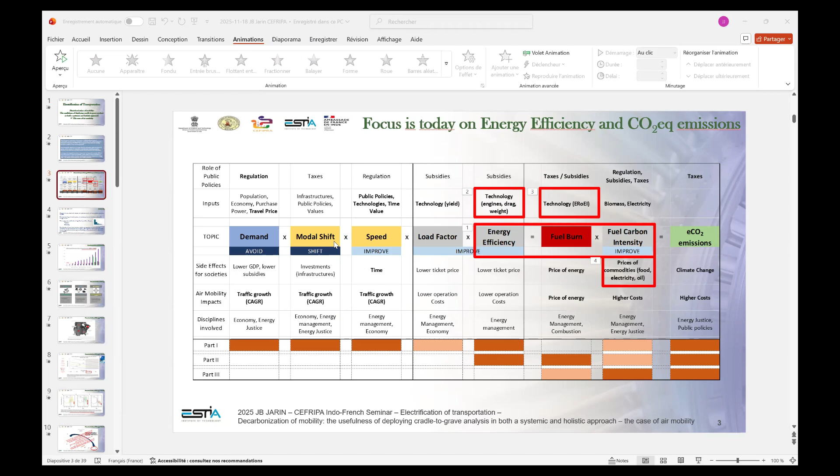We know aerospace or air mobility in general is very global, but you will understand that the impacts can be very local. When we look at mobility, and especially air mobility, we must acknowledge that it means the total decarbonization of the energy sources. This is higher than for cars, because when we look at a plane, in fact 99% of the emissions, when we look at the life cycle analysis, are linked to the combustion of the kerosene.

Biomass and/or electricity, and by regulation or the market - I personally would prefer regulation because the side effect for the populations will be huge. We must acknowledge that it will have consequences in our territories because we will take massive amounts of electricity and biomass. On this slide I try to show the effect technology can play.

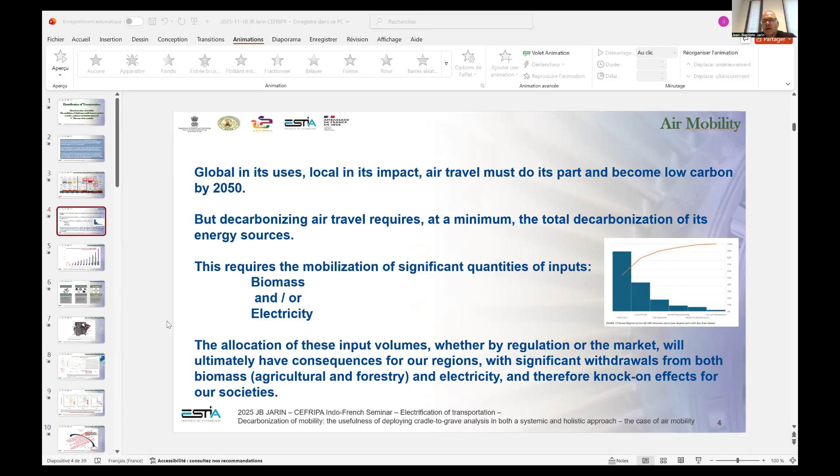But if we have a rebound effect, known as the Jevons paradox, which is that you can improve a system, but if the use of that system is increased, then the overall effect can go in the wrong direction. And this is the case for air mobility.

We have improved the efficiency of planes for the past 60 years, but this came with a lower price of the ticket, and so roughly we divided by 4 the fuel burn per passenger kilometer, but at the same time the traffic was multiplied by 20. So you can see that the fuel burn and the emissions associated just keep rising.

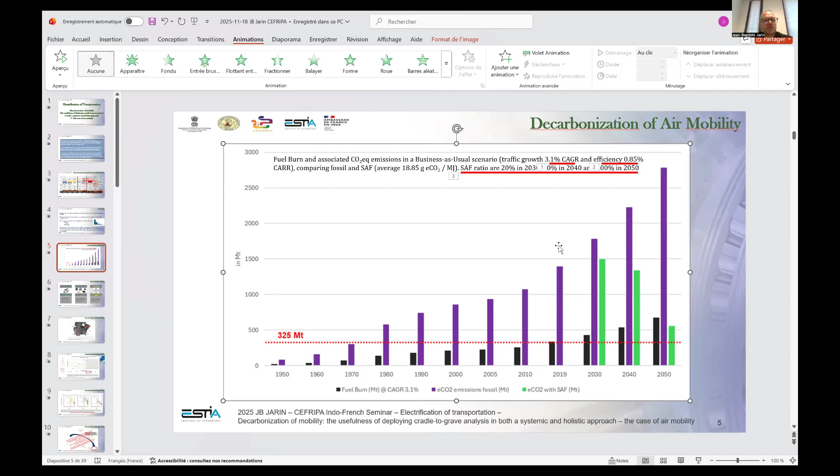Here is a scenario I modelized. I'm not sure you will see the animations, except if I do this, okay. So if the traffic keeps growing at 3% compound annual growth rate per year, which is what's happening today, and we keep the efficiency trend, which means high engineering to keep improving planes and engines efficiencies at 0.85% per year, you can see that since the market will grow faster than the engineering efficiency, the fuel burn and emissions keep rising.

So the only way, and even it's not enough, is to go into 100% decarbonization of energy by 2050. I do not believe this will happen, but at least this should be the goal.

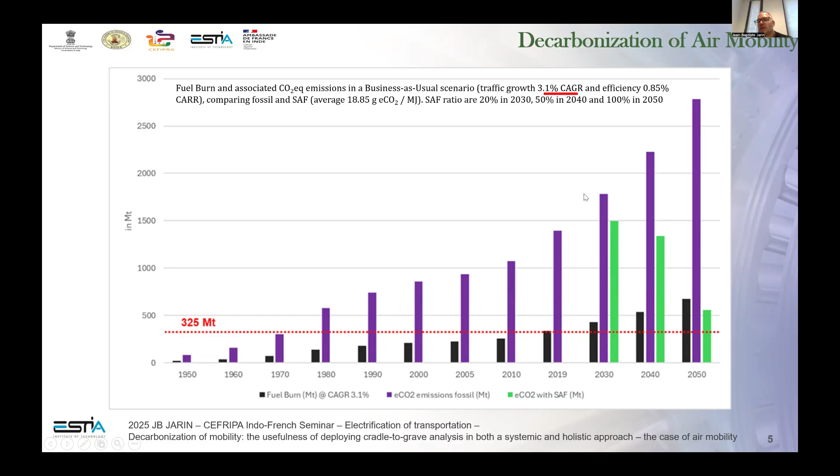So when we talk of decarbonization of energy, and this is valid also for electricity when we look at road transportation, we must make sure that it is sustainable. For example, for electricity, that the electricity is low carbon, which is not the case in many parts of the world, and it's not the case in India, as you know, for now.

We also must look at optionalities, which means in fact competitions or conflict of use, because when we look at biomass and electricity, you have many players. And there also we must understand that we come from the oil world, and oil today is massively dedicated to mobility.

Okay, so when we shift from oil to other sources, such as biomass and electricity - biomass and electricity, they did not wait for mobility to be used by populations. So there will be multiple conflicts of use, and we must understand that when designing systems.

And also we must understand the economics, and especially for the biomass, the economics is about collectability. If you have, and you will see that on the map very soon, a dense energy, it could be okay. But if you have very low energy density...

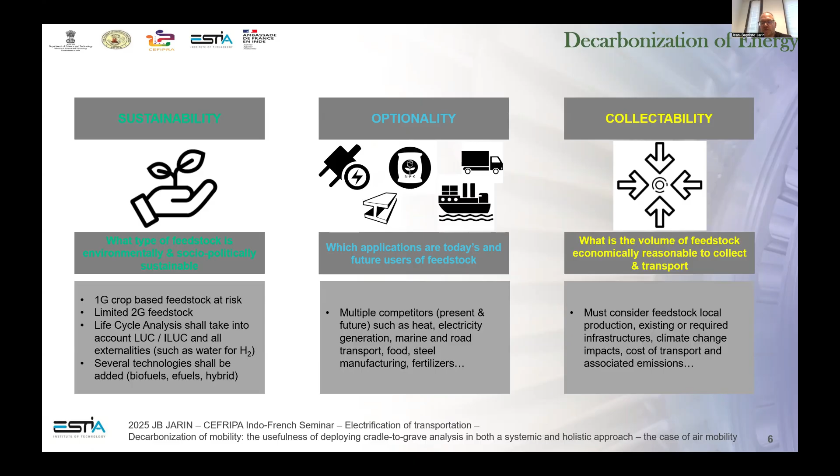For example, lignocellulosic from the trees, this means a very low collectability. This means a very high cost for the societies. This is a map I mentioned.

This is something, and you must understand that most engineers know what's going on for decades. This is from May 2009, so roughly 15 years ago. This is the impact if we want to have planes flying across America, or the United States to be precise. This is the surface of land we need to feed those aircraft flying in the United States.

So it's not the planes outbound of the United States - this is purely domestic use. And you can see that we need, for the 1G, the first generation biofuels, extensive surfaces of palm oil or corn.

And if we move into the second generations, so the waste, typically the jatropha or the camelina or other plants which are seen as energetic plants, you can see that basically you need half of the surface of the country just for the domestic planes of that country. So this is not in sight. I mean, we cannot achieve that.

Algae could be, but algae has many issues. And especially, in fact, you need more energy to extract the oil from the water than you can get of energy from that oil. So algae, it's good, I would say, for R&D, but it will not come for decades, that's for sure.

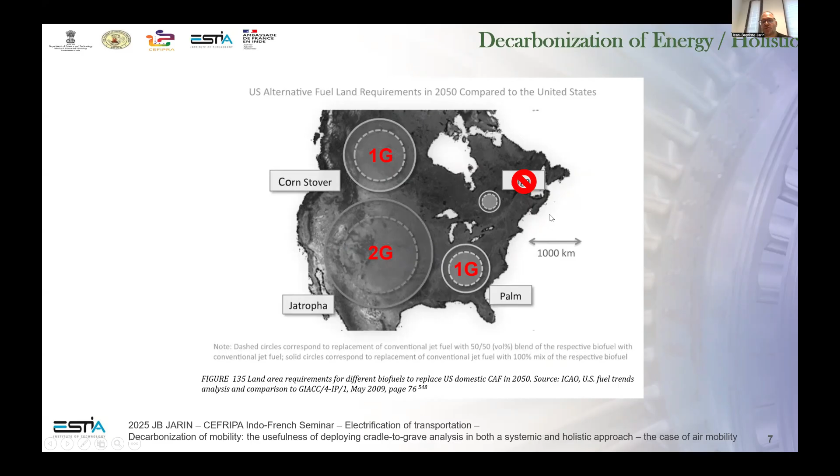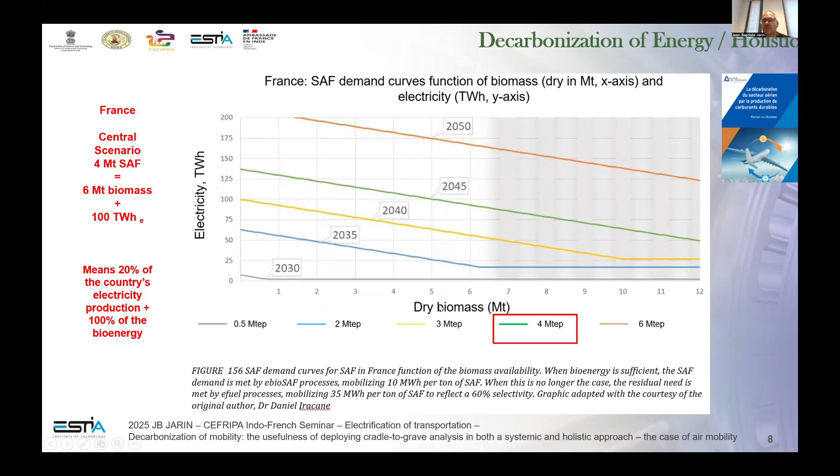Basically, it comes with collateral damages. No energy has no collateral damages, but we need to look at efficiency and then also at equity, because when you take 100% of the biomass and 20% of the electricity, you can imagine this will have side effects for the populations. Among the side effects for the population is the price on commodities.

Here you have a study from the US Academy of Science in the United States. They worked for approximately 15 years over the period. And what they demonstrated is that the price of commodities such as corn, soybeans, or wheat is affected by the policies on biofuels for transportation. And the effect is already very huge.

I mean, biofuel for transportation is less than 5% of the fuel, but still you can see the effect on commodities such as corn is 31% increase of price for the corn, or 20% for the wheat, basically. And this is food for the populations. So we must understand that our choices have significant side effects for the entire populations. This is why a holistic view is mandatory when you look at your energetic system.

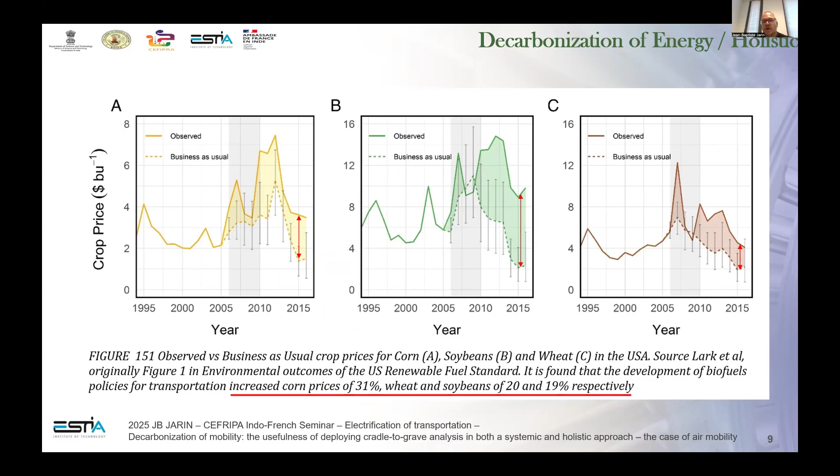When we look at efficiency, and especially when we come from fuel, from oil, and we look at energy, we must understand energy return on energy invested. This is, I would say, key in every design, because every propulsive system will use primary energy, then transform into an energy carrier. So energy return on energy invested, basically, we come today from here, onshore, offshore oil, mainly. This has very high return on energy invested. Basically, you place one, you get 20 to 70 for onshore. So this is very, very efficient.

And then you can lose that efficiency in an internal combustion engine, which has a 30-40% yield. You can afford that because you have a very, very high energy return on energy invested at the beginning. But where we are going is here. I mean, biofuels and e-fuels based on hydrogen are pure exergy. I mean, we lose, I would say, everything. I hope you have that insight, but my first year engineering students generally tend to forget that.

But the lower heating value of hydrogen, which is the core of an e-fuel, basically, the lower heating value of hydrogen is 33. So you have 33, I would say, kilowatt hours of energy in 1 kilogram of hydrogen. But to split the water molecule, H2O, to get that hydrogen, you need 50 to 60 kilowatt hours. So you are destroying energy. It's a negative, I would say, energy return on energy invested.

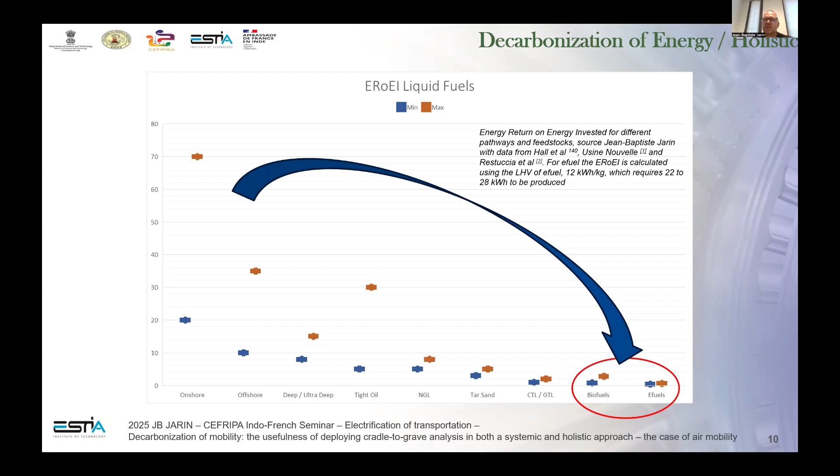And you need to acknowledge that, because this means you need to be very, very clever in all the systems you will design. So sooner or later, we must understand that it's not the technology which is the issue, especially for the sustainable aviation fuel, but it is the availability of the inputs, the very low energy return on energy invested, and the cost associated.

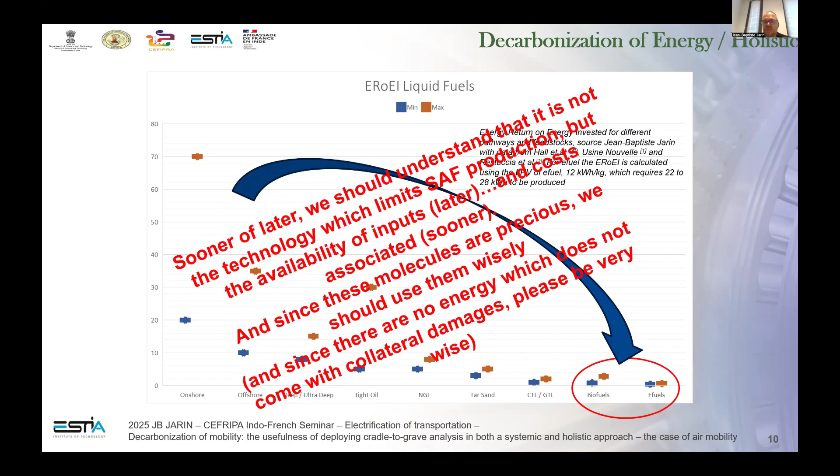And since we are dealing with molecules which are very precious because of the above, you need to be very, very wise. And since I already mentioned it, there is no energy which comes with no collateral damage. Please be very, very clever and be very, very wise. Let's go into cradle-to-grave, and I will translate that into well-to-wake. I will explain in a few.

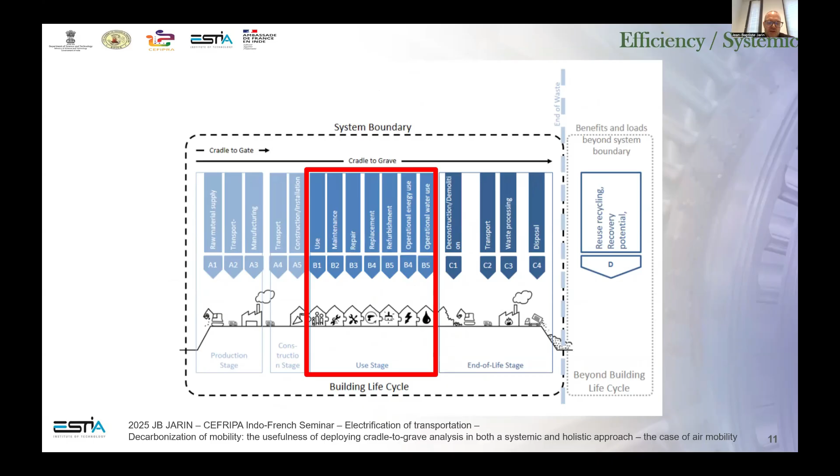So basically, we go into the life cycle analysis there, and when we translate that into energy systems, basically we go from the energy carriers and we have the associated propulsive architecture. So this is where we come from, primary energy, which is oil. We get a fuel tank, and then we get an engine. In our case, in aerospace, it is a gas turbine. The system will be very similar, in fact, identical, when we go into e-fuel or biofuels.

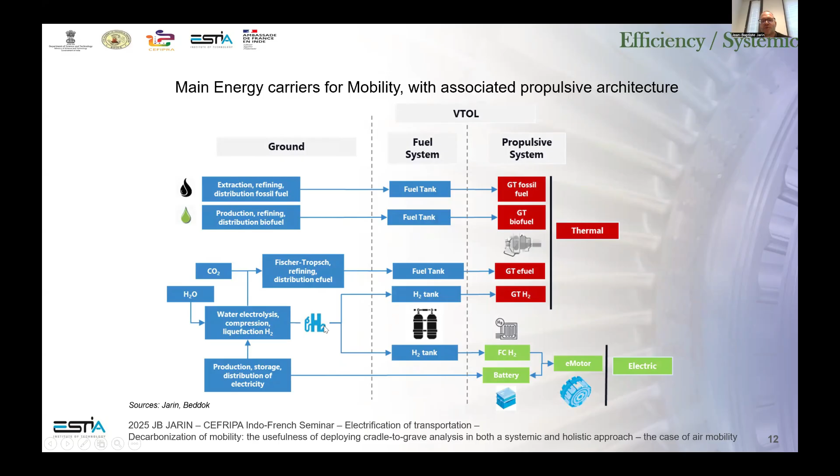But if we want to deal with full electric, or if we want to deal with hydrogen, then the system will be slightly different, especially for electrics, of course. So from the cradle to grave, here we translate into well to wake, or well to rotor. And the figures you have here are the same as for road transportation. So I believe that most of you already have those figures in mind.

When we go into direct electrification with battery, if I place a base 100, basically I take 100 kilowatt hours of electricity from the grid. Okay, so electricity is an energy carrier, but in that case, I could consider electricity as my primary energy for the system. But of course, it remains an energy carrier. So if I pick 100 kilowatt hours of electricity from the grid, I will lose some of that energy in transport, storage, and distribution, approximately 5%.

I will lose some more in the AC-DC conversion. I will lose some more in the battery heat management, for example, and I will lose some in the e-motor during the conversion with the friction. But the global yield still remains very high, 83%. So I have a system with a yield of 83%, which is, in a kind of way, pretty spectacular.

If I go into hydrogen with a fuel cell, and that is for an aircraft or a car, because this is my system before integration, I will lose a significant amount in the water electrolysis. I will lose some more in the transport, storage, and distribution, assuming you remain local. I mean, importing hydrogen over long distances is total nonsense. Okay, so your hydrogen is produced and you use it locally. It doesn't cope with international shipping.

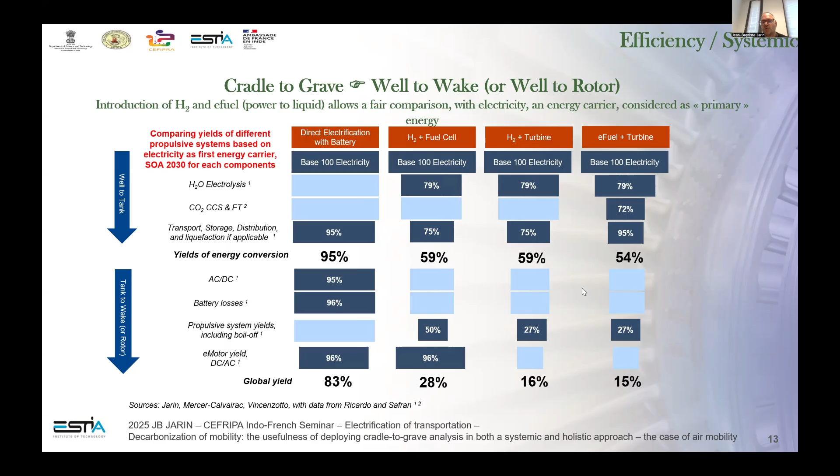So those figures are before the integration, and the integration, when we compare cars or trucks and helicopters and planes, is very, very different. So also as an engineer, you need to understand basically the well to tank and all the energy return on energy invested principles. And then when you go from tank to wake or tank to rotor or tank to motor, you need to understand the system you are working with as an engineer. In our case here, aerodynamics, weight and balance, and thermal management are the key points.

If I take MLW or MTOW, so basically the maximum landing weight and the maximum takeoff weight, you can understand that it is very different when you deal with kerosene and when you deal with hydrogen. And this is why I am very skeptical with the hydrogen plane, just because of that. There are many, many other reasons, but just because of that.

I mean, when we design a plane, we need to take off. And so we will design the thrust and the energy we need to embed based on the maximum takeoff, understanding that the maximum takeoff is very different from the maximum landing weight. Basically, a plane carries passengers, but first it carries fuel. You have more fuel in weight than passengers in every plane.

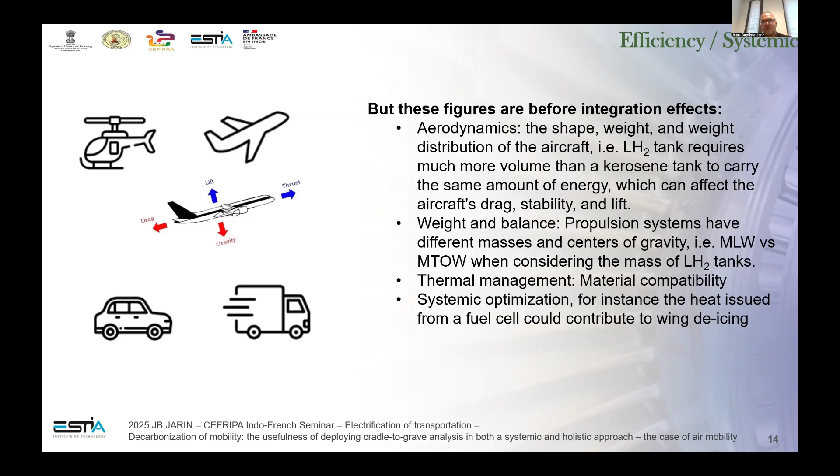When you have hydrogen, the hydrogen weight is nothing, but the hydrogen tanks' weight is huge. And that weight of the tanks is not disappearing during the flight. So this is a single reason amongst dozens of other reasons that when we consider hydrogen in a plane, it's very, very difficult to make a design which makes sense, basically.

So we have a plane. It can be a VTOL, so vertical takeoff and landing. It can be a conventional takeoff and landing, so a plane, or a short takeoff and landing, which is a kind of plane, I would say. And so we have a very versatile machine, and it makes comparing apple to apple very complicated. Typically, this is for the helicopter, because this is where I spent my PhD in designing and testing.

When you have a helicopter, the same helicopter can do medevac, offshore transportation, firefighting, military, and others. So basically, you use it for missions which go from 20 minutes to 3 hours, and for distances which go from 5-10 kilometers if you do utility, to 300-500 kilometers if you do, for example, a transportation of a patient or a military operation, or offshore. Typically, you fly 200-300 kilometers to the platform and then back. So the versatility makes it complicated.

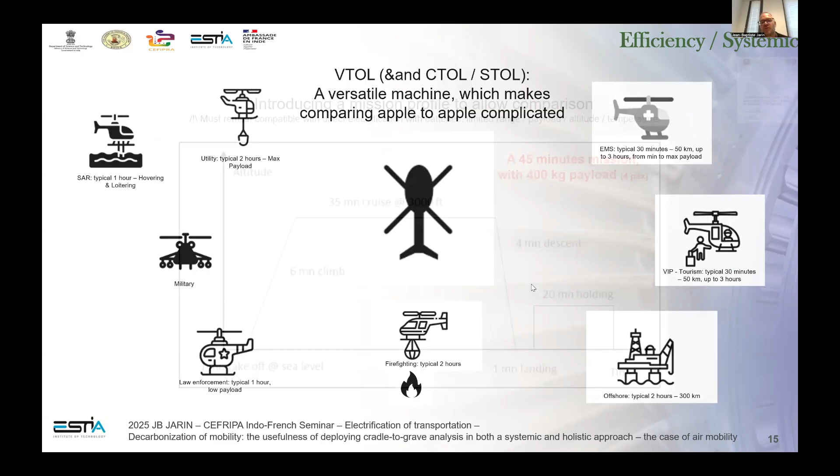So the decision in the figures I will present, to compare the different propulsive architectures and the different energy carriers at stake, was to introduce a mission profile. And the choice of a mission profile was complicated because we cannot take the initial design of a helicopter to compare, because otherwise it immediately disqualifies battery electrification in our case.

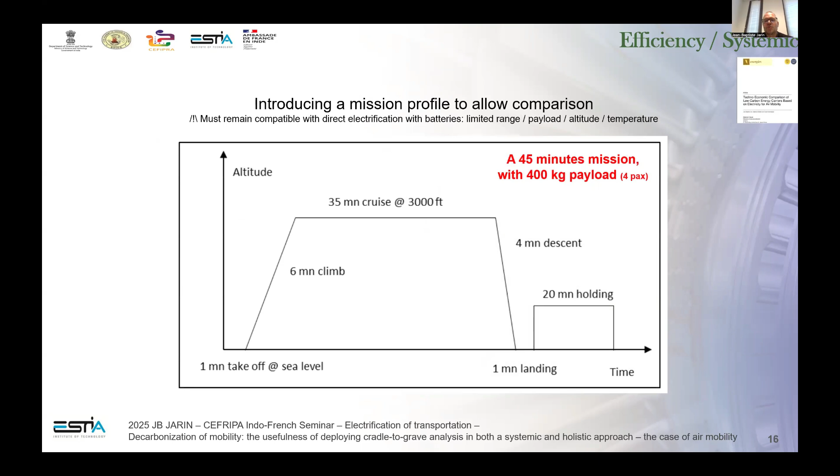And we wanted to include battery electrification so that we can compare the different energy carriers and the different propulsive systems. So we picked really the maximum of direct electrification, which is a 45-minute mission with a very limited payload of 4 passengers or 400 kilograms on board. So it is a narrow application, but with such an application we can compare everything, apple to apple.

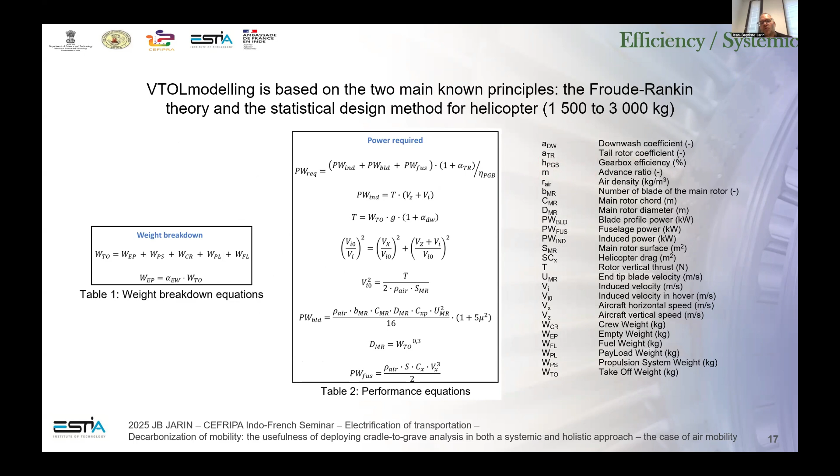So when we have that, we do our design. Basically, in our world, the designs are based on the Froude-Rankin theory, and then we go to a statistical design method, so that we can make sure that we can lift, we can hover, and we can do the distance with the payload we want to carry. And so we apply that statistical design method over and over, using the different hypotheses for the components we have. So this is the empty weight of our machine there.

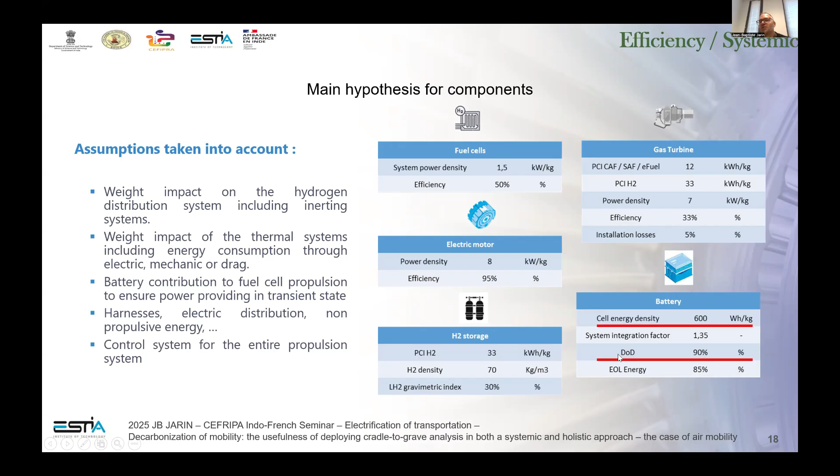And there I put in red that we have been very optimistic for the batteries. You can see we chose a cell of 600 watt-hours per kilogram, which does not exist today, and which most probably will not exist in the coming decade. But as I mentioned, we did not want to disqualify full electric for that study. We also went to a depth of discharge of 90% and an end-of-life energy of 85%. So we have made very optimistic hypotheses for the electrification, on purpose.

And so we apply our statistical design. We have the mission profile, and so we check with the maximum takeoff weight assumptions. We do the sizing of the helicopter with the energy on board and the propulsive system weight.

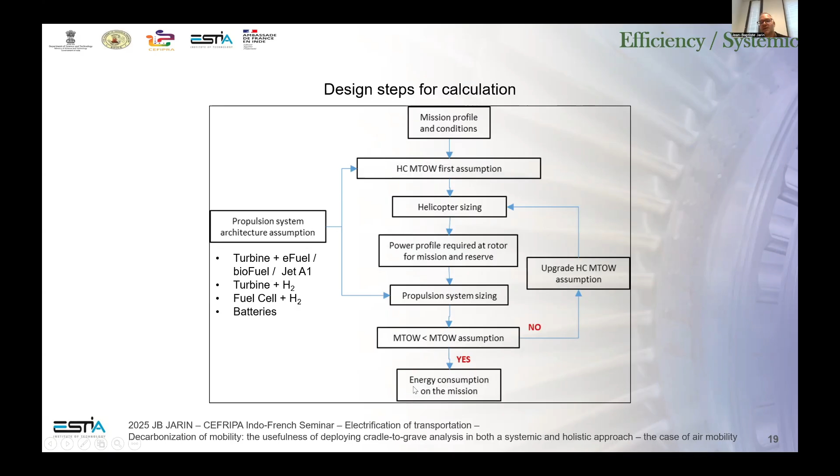We do the power profile required at the rotor, and then we go on the propulsion system sizing and energy we need to embark on board. And do we have a takeoff or no? If we have the max takeoff weight, which is above our assumption, it means we need to get a heavier helicopter with more energy on board, with more powerful engine, so that we can fulfill the missions. And we do that loop again and again until our assumption is validated, and then it gives the energy consumption for the mission.

When we do so, here you have the main results. You have the weight of the main components, so the weight of the fuel cell and the H2 tank, the weight of the thermal engine, if we apply it, the weight of the electric motors, and so on. And then in blue here on the right, you have the main results. So you have the propulsion system weight. You can see there is a huge difference between battery and hydrogen system based on conventional fuels and therefore on e-fuel, which is my last line here.

That means that the helicopter takeoff weight is very different. In our baseline scenario, it is a 1.4 tons VTOL helicopter. If we go into a full electric, it's more than doubled. We are close to 3,000 kilograms for the machine. And then you have the quantities of energy we need to spend to do the mission and on board. So for electricity, it is kilowatt hour of electricity. For hydrogen, it is kilograms of cryogenic hydrogen. We need liquid hydrogen. If we are gaseous, it's too big and we have too much drag. So we need to be cryogenic.

And then you have the weight of the e-fuel. Remember, I mentioned we have 12 kilowatt hour of energy density per kilogram of e-fuel. We have 33 per kilogram of hydrogen. You can see that there is already here a factor 3 between the two. So when we have that result, then we can look at the impact. I would say it's at the end of the systemic approach before going back to a holistic approach. What is the total electricity consumption for my missions? Let's say I can afford to have a 2,900 kilograms helicopter. What is the quantities of electricity I put on board?

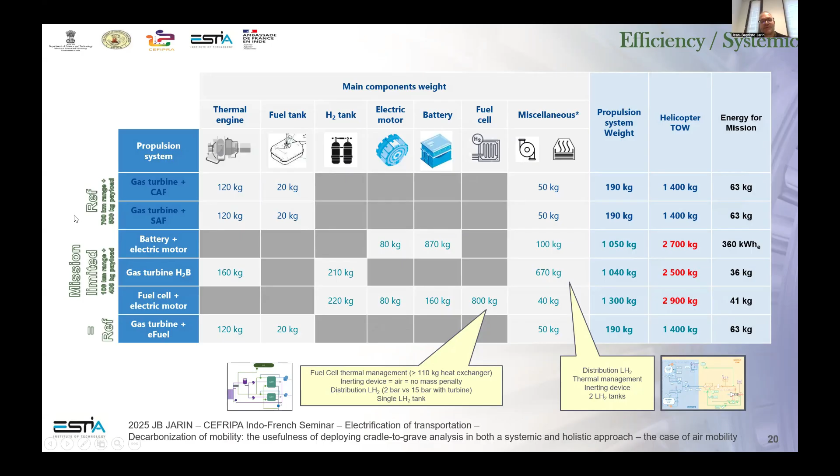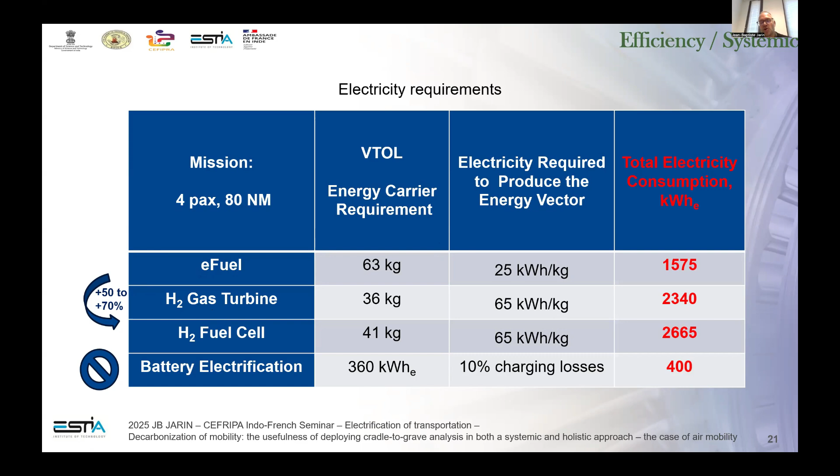And when I go from e-fuel to hydrogen, my electricity consumption is roughly 50 to 70% more. So the basic conclusion at that stage is, why bother with a hydrogen system? If I have hydrogen, I rather transform it on ground to an e-fuel, basically, than taking overweight, and not mentioning all the safety issues, storage issues, boil-off issues, and so on, if I have to deal with that molecule. So since I have the electricity consumption, the assumption is that I can take that electricity from the grid, and then it's very easy to compare the different architectures with the energy carrier being electricity, and my CO2 emissions are directly proportional to the electricity carbon intensity multiplied by the electricity required for the missions.

Here's a graph we made in the publication. It was with maximum of 340 grams of CO2 per kilowatt hour. Today in India, you have a lot of coal, so you are way above that number. Based on the question I heard during the panel, it doesn't change the interest of direct electrification for cars. But if you want to put electricity in hydrogen or e-fuel, it changes everything. Because we need a lot of electricity, we have a very low energy return on energy invested. And basically, keep that number in mind.

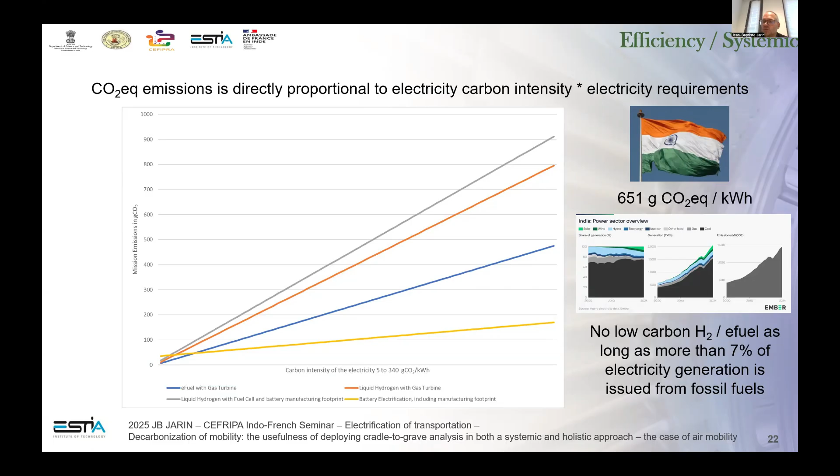You have no low carbon hydrogen or no low carbon e-fuel as long as you have more than 7% of electricity generation issued from fossil fuels. I mean, the carbon footprint will be too high, and basically you'd rather use fossil oil than an e-fuel or hydrogen in those cases. Totally different for direct electrification with batteries for cars. But if people tell you to work on hydrogen or work on e-fuel, these are fully valid figures. Time is running, so I will go on. And also to understand the cost is very easy. The cost is the same as for the CO2 emissions.

The cost is directly proportional to the electricity cost multiplied by the electricity requirement for the missions you're having. And with that, I can move on to the holistic and to the conclusion again. So the future cost of the mission, when we move on those energy carriers based on electricity, is impacted by the cost of the primary energy, in that case electricity, multiplied by the energy return on energy invested we have chosen for the molecules we want to transform, multiplied by the system efficiency.

So that means that technological neutrality, we hear that a lot in Europe. I hope you don't hear that too much in India. But technological neutrality doesn't make sense at all. It's pure marketing. You must assess the efficiency and the energy return on energy invested to compare the different systems, because you've seen that you can have a 500% difference in efficiency, and I do not see a system which can afford to be 500% less efficient than another one.

And then come the issues on the impact, the volumes of electricity you will take to the system, knowing that you have other users. So you are increasing competition, and in an open market, with increased competition, if the demand is higher than the offer, the prices are going up. And electricity serves vital needs. We need to clean water, we need to bring water with electric pumps, we need to heat, we need to cool our food, people during heat waves and so on. So electricity is a vital need for everybody in fact. So if you have a very inefficient system which requires five times more electricity than another one, you are going into trouble.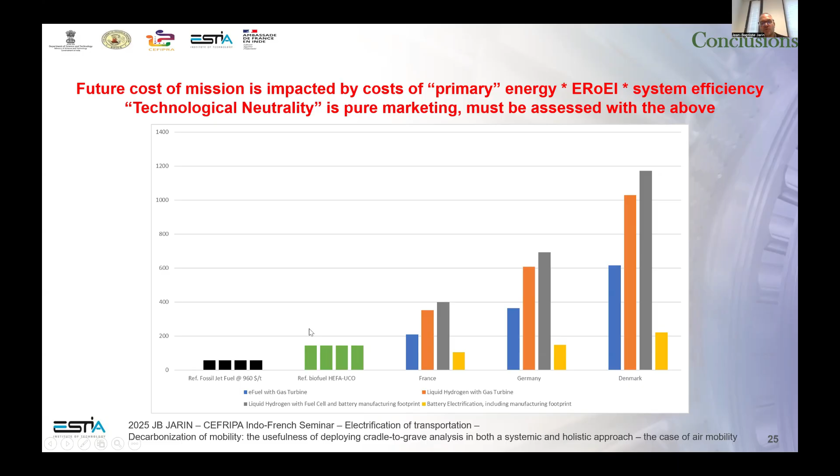You also can compare the cost of the different solutions, and you can see that for aerospace, going into sustainable aviation fuels coming from the most efficient biomass is already very expensive compared to fossil fuels. And going into e-fuels, the price will be very different country to country, because the price of electricity is very different country to country. But in every case, it is much more expensive than the good old fossil fuels that we need to get rid of. I'm not defending fossil fuels. We need to transition as fast as we can, but that comes with efficient systems, and with a cost for societies that we must understand and acknowledge.

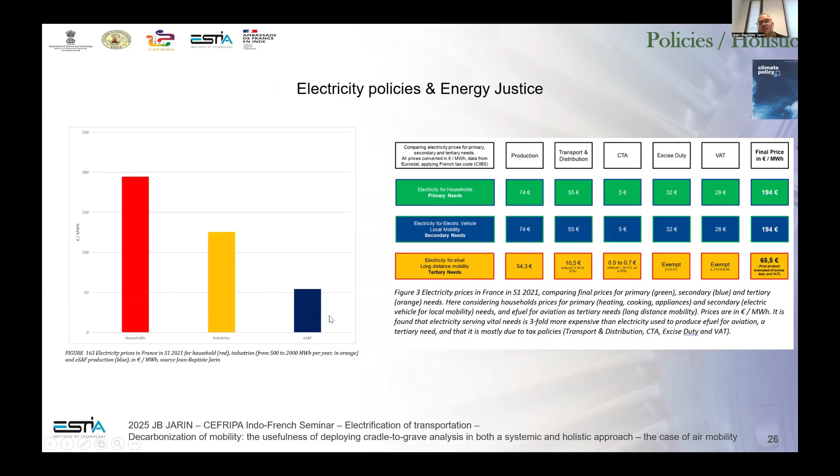Another issue which comes with the electricity policies is energy justice. These are figures I've built for France. It's an important article I published earlier this year in Climate Policy. But you have the same principles in India. You have your energy, and then you have taxes on that energy. The difficulty with hydrogen and e-fuels is that they require a lot of electricity. And the taxes are very different. Here you have the taxes in France on households, the taxes for industries, and the taxes for e-fuels and hydrogen. And you can see that the taxes are much lower for e-fuel and for hydrogen. This raises significant energy justice concerns.

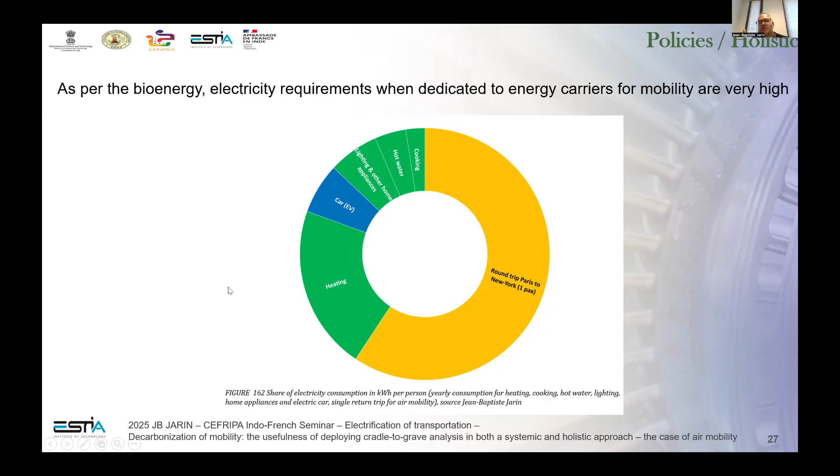And this is my last slide. When we take the taxes associated, here you have the volume of electricity, and here you have the taxes. The electricity everybody uses for hot water, lighting, cooking, for all the vital needs, is heavily taxed. Electricity for local mobility, such as electric cars, is heavily taxed. But the electricity for e-fuel for planes is almost non-taxed. So there will be disparities, because the tertiary needs are not taxed while all the vital needs are fully taxed. These are the kinds of questions which come when you design a system based on different energy carriers. So be wise, be clever in the choices you make, and look at efficiency and equity as often as possible.